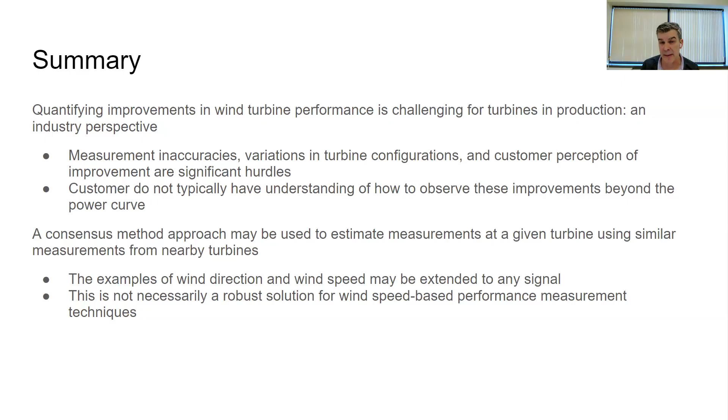For that, really, you can use this for any signal. And even though we can do this and it's great, I still don't know how robust it is. There are limitations to it, but I think there's some useful applications of this that I'll give the example for wind direction.

So the objective is, operators and owners want to observe improvement in their performance after they make a modification, whether it's something we suggest, which is typically hardware, or they do some maintenance. We typically do software upgrades, but they might add VGs, things like that, or they do some maintenance. They clean the blades. Do we see things get better? They make repairs. They would like to see things get better.

Some of the challenges, from our point of view, is we want to have a nice clean experiment. You have a baseline for the turbine operation. We make a single parameter change, and then you have this data collection period where you try and optimize.

But all too often we have things where either OEMs push software upgrades that change performance, or the customers have to do maintenance. They aren't going to push off their maintenance so we can collect our data. So there are challenges with that, that make this even harder to do beyond the fact that it's a real world situation.

If they make the change at just the wrong time - we have some sites where the winds blow from the east in the summer, west in the winter. If they make a change right in that transition period, your before period is winds from the east, your after period is winds from the west. It's not really a fair comparison.

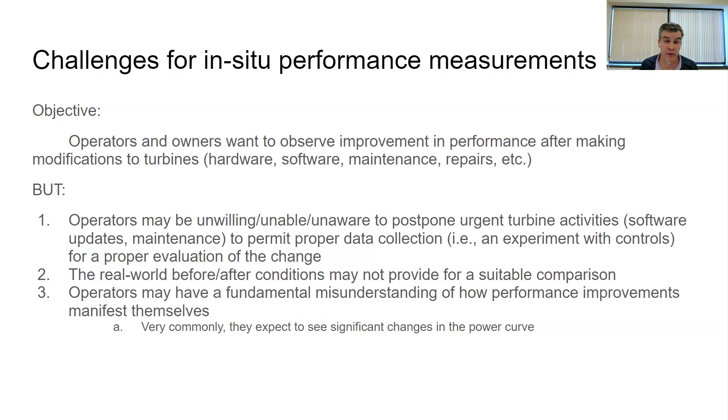Other challenges we encounter: each turbine is unique in its configuration, aerodynamics. They may have different blades, different cleanliness, newer blades, older blades, things like that. The maintenance of the turbines may vary from turbine to turbine. Topography and meteorology can vary significantly from turbine to turbine, especially in areas like California where they put all these turbines in the Altamont Pass. Really challenging area to do any kind of measurements.

What we've found and how we try to approach this is we want to use no additional hardware. We're trying to do this fully SCADA-based, which means we don't want to recommend customers drag around LiDAR, which I think can be valuable, it just makes it harder to change 20 turbines and get timely estimates. So our goal is to not use that.

We also try to avoid using a Met tower just because they may be old, not well placed for the turbines we care about.

And the other thing is, we have turbines laid out in a grid. So how do you measure performance improvement for a turbine in the middle? It can have waking conditions, which if you went by an IEC standard, we would ignore those, but customers make a change, they want to measure an improvement. So there's additional challenges with what do you do with the turbine in the middle of a wind farm.

We do use nacelle anemometry for some things. I like to view it skeptically, just because nacelle transfer functions can change, either the anemometer's out of calibration or anything. I'm not saying don't use it, just be aware of the drawbacks of that.

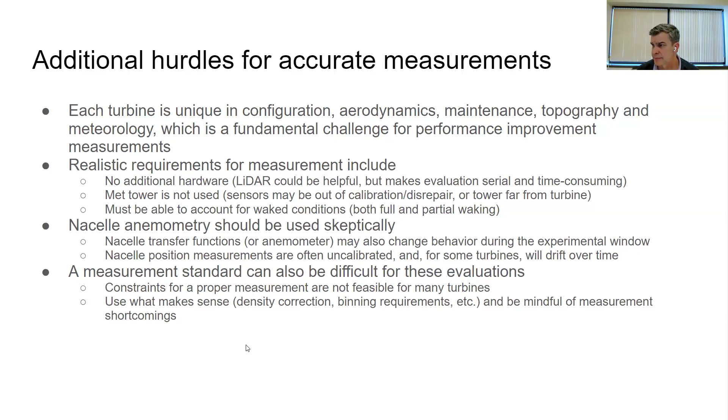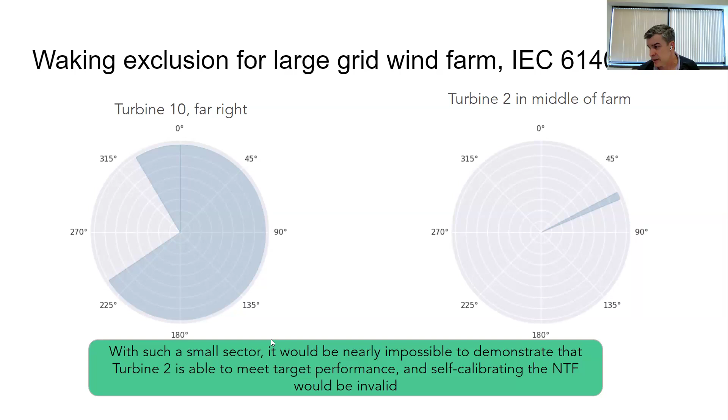Other customers understand that this isn't reality, so I'm not blanket stating all customers. We have this wide spectrum where some people say make them all look like that, and a lot of times what they want us to make them all look like isn't a feasible thing.

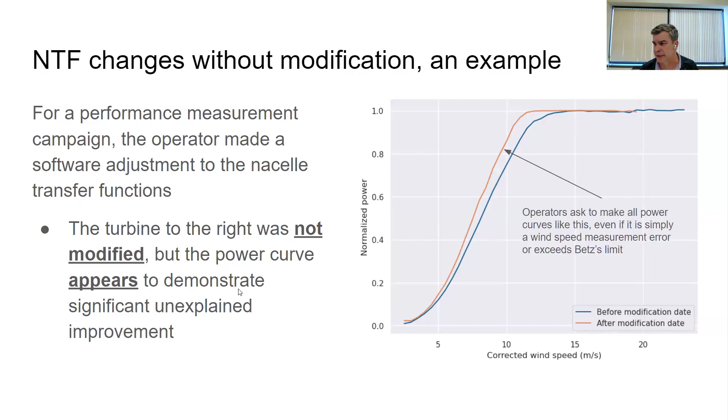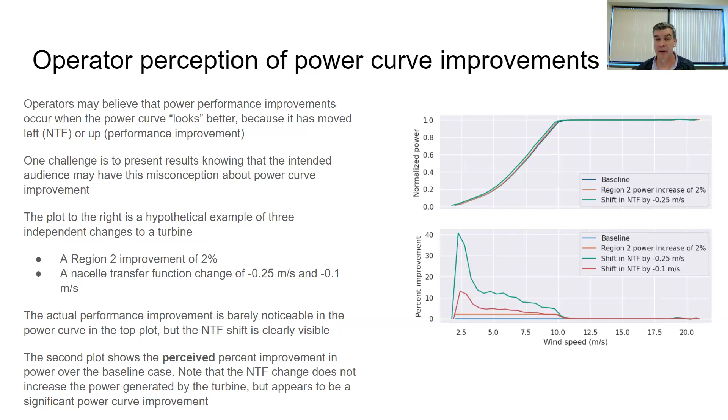So one thing I'm hoping we can get from this working group is a standard that helps customers understand this and be able to measure power performance on their own as well, so we don't have that issue of trust between the recommender of the improvements and the measurer of the improvements.

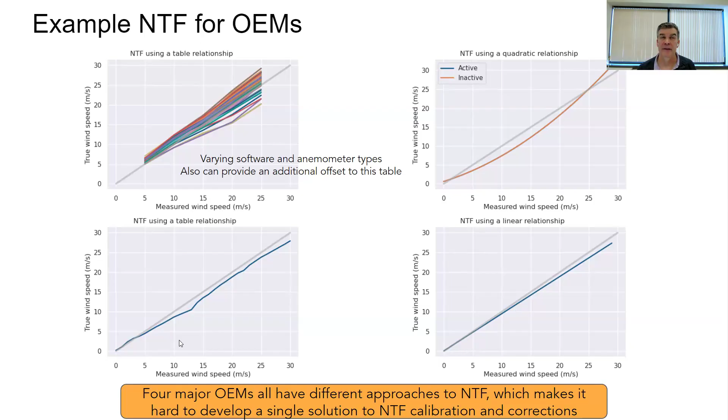So there's not necessarily a single way to improve a nacelle transfer function. If you just have a linear relationship, it's very hard if the wind speed measurements are different—the table is much nicer for that kind of thing. What we've seen is it's blindly applied to every turbine on the farm. They're like, here's the table lookup, just use it for the whole farm. So we don't see turbine-specific nacelle transfer functions in our experience.

So what could help? I've mentioned this a couple of times. It'd be great to have a robust, reliable, transparent, and straightforward approach to quantify performance improvements. Much easier said than done—I know everybody's tried to find a way that works in the real world.

So what I'll be talking about next is this measurement consensus method. It's just one way to help estimate a more likely value for the measurement—any measurement. I'll be talking about wind direction and wind speed, but you could use it for any signal you'd like. We're going to base this on the behavior of nearby turbines.

So this is sort of baseline motivating work for WindESCo's wake steering swarm solution that we have. We're looking for a more cooperative approach among the turbines rather than greedy, where every turbine says this is my measurement of wind direction. We're going to start to look for cooperative measurements of wind direction, and try to find a more likely measurement value.

NREL did a lot of this initial work, Jennifer Annoni did it. Then WindESCo, we did some joint research. We had a wind farm that we are now currently doing swarm on, our wake steering, but we did some base research on this to look at these wind direction consensus methods.

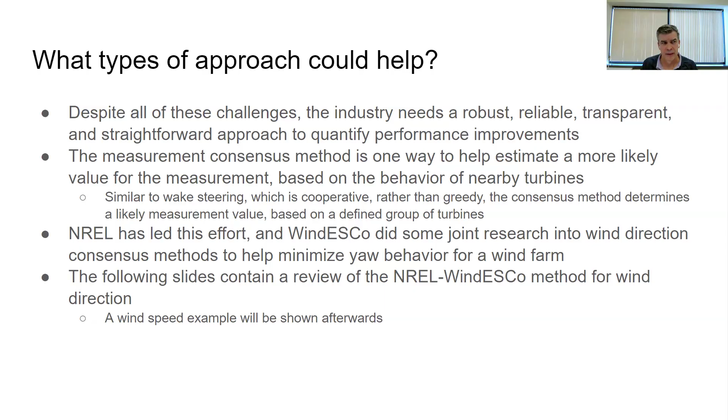At the end of this, there are links to the presentation I took the rest of these slides from, and the original paper if you're curious how it's implemented. I'm not going to show any math here—there's a lot of math, but this is what it looks like and how it gets implemented.

Typically, wind turbines operate individually, optimizing their own performance. The yaw position, or the yaw error of the turbine, is determined by the wind direction sensor behind the rotor, so it has its own measurement issues as well. Sometimes measurements are noisy, sometimes susceptible to different things, and this can lead to yaw misalignment of the turbine.

This is really talking about dynamic yaw misalignment, where instantaneously the turbine is not aligned with the wind. When turbines reach a certain threshold, different for every OEM, of what's considered not pointing into the wind, they'll yaw back into the wind based on these measurements. There's some kind of time period, maybe some averaging. Some OEMs are very quick and could probably relax their yaw controller a little bit; others are very lazy, very slow. They have different thresholds—as a general rule, maybe 1 minute at 10 degrees off, or 30 seconds at 6 degrees off.

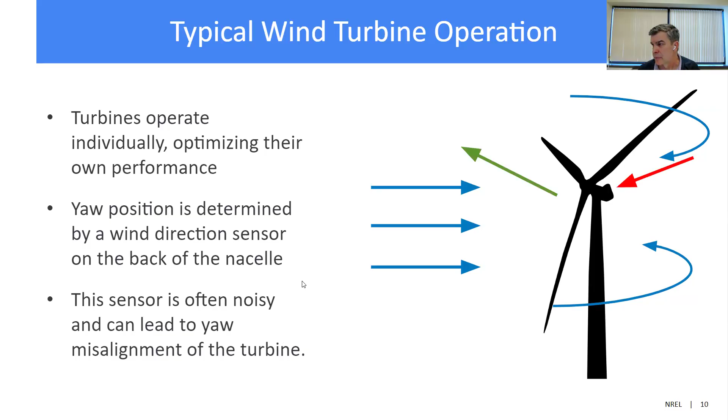So I had not realized these slides are dynamic. Cool. So misalignment can occur across the wind farm.

Each turbine at any moment in time is seeing its own misalignment to the wind. Here is an example showing the wind blowing left to right, but the first turbine is somehow misaligned clockwise. The turbine behind it is misaligned counterclockwise, and so on. This front turbine in the second row is pointed right into the wind, and so on. So instead of all these turbines trying to guess the wind direction, here is a straight west to east wind, but each turbine has its own best guess of where the wind is coming from. Some of that may be driven by topography, so this method is great but not perfect.

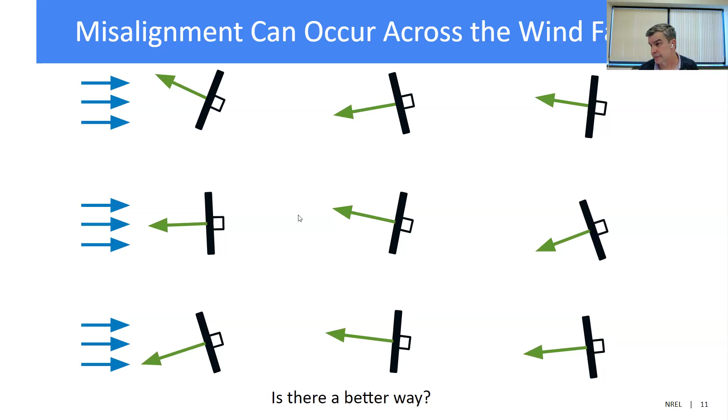The solution NREL proposed is to do some increased communication. The reason they partnered with WindESCo is we have lots of real world data. In this case, this is a 58 turbine farm, and on the left we're showing some real wind direction measurements at a moment in time. Fortunately, in this case, this site's nacelle directions are calibrated to north. This site has wind sector management, meaning they have to shut down when the wind's blowing from certain directions for loads reasons, so they're very diligent about making sure that when the nacelle says it's pointing north, the turbine's actually pointing north.

The end result we see, and we'll talk about how this comes about, on the right we've estimated a wind direction. Rather than on the left where each turbine is pointing in a completely different direction—this bottom row, there's one turbine that thinks the wind is coming from west-northwest, all the others are saying north-northwest-ish—we run this consensus method, and now we get much better estimates of the wind direction.

You can see these still vary cluster to cluster. This cluster in the northwest corner, wind is coming north-northeast-ish, but just the cluster to the southeast of that, the wind looks like it's coming from the north. So there is some sensitivity to geographic location, and that's because this wind consensus method has a distance weighting, where turbines that are nearby count more heavily towards the information we care about.

So the other thing that's nice, and we'll see some examples of that, is this can also correct for faulty or noisy sensors, which I think is a great opportunity for this method to say, hey, this sensor is measuring the wrong direction. Maybe its north position needs to be corrected, or maybe an anemometer needs to be recalibrated, or its transfer function, things like that.

But one thing it does not do, in and of itself, is the consensus method won't correct for things like north alignment. That still needs different approaches. This is just saying we want all the turbines to agree on a direction for the wind. It may not be an accurate direction for the wind, but we're just trying to get some precision.

So you think about the target. You want small clusters. If they're in the bullseye, that's great, but small clusters are better than a scatter approach. So north alignment is a different problem. This doesn't fix that problem.

And the other requirement is that you can't have turbines drifting in their nacelle position, because now you're trying to correct positions and you're not quite sure what's going on, because everybody's truth is different from moment to moment.

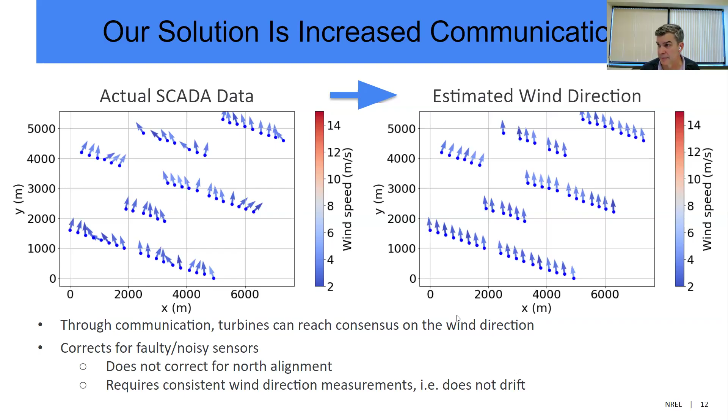So a little more detail about this data set that we have. This is a very large wind farm. These are all 2.5 megawatt turbines. These turbines are calibrated to the north. We've collected 1 hertz data, and the nacelle direction, power, yaw error, wind speed, and pitch. For these turbines, we can also calculate 1 minute, 5 minute, 10-minute statistics from this 1 second data.

We provided 8 months of high-speed data. At this site, we do have a Met tower that provided information on wind speed and wind direction. This Met tower is also maintained and calibrated, so we know we can trust these measurements as well. That's not always the case at farms we've encountered.

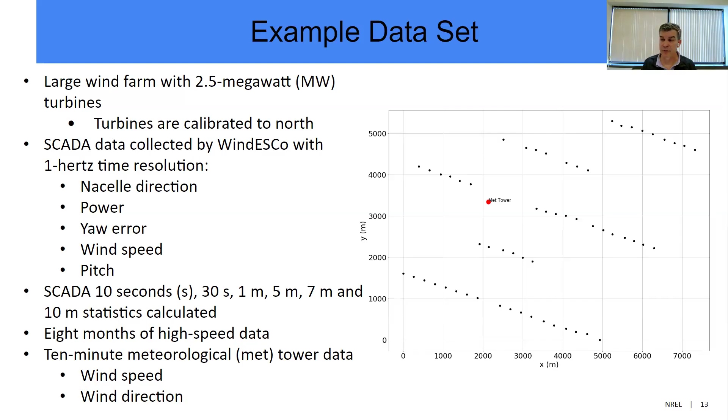So here's an opportunity. You can look and say, well, the measurement is significantly different from the consensus value, so there must be something wrong with that sensor. That's a really nice benefit of this method, is that you could identify faulty sensors from that kind of comparison.

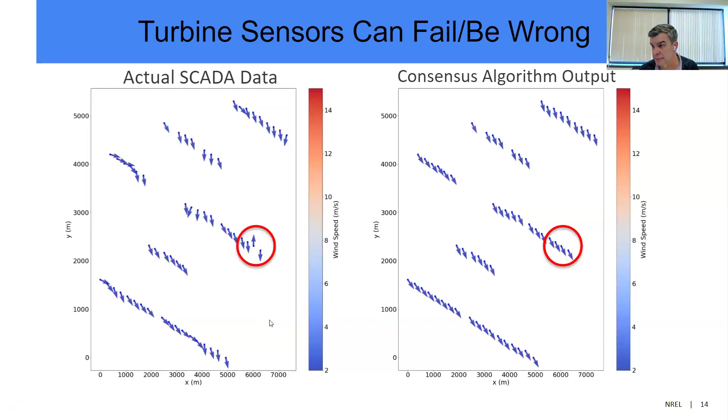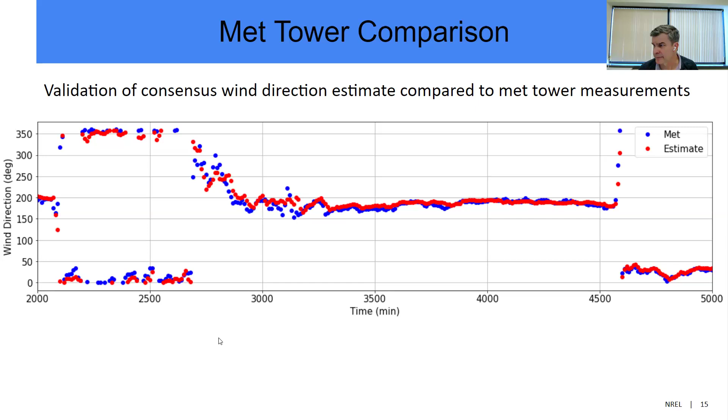So some challenges and some other alternative concepts that NREL and Windesco looked at. Because this method is relatively complex to implement—it's not impossible, it's just complex compared to these other methods—they evaluated some simpler methods to say, do we even need to be doing something this complicated?

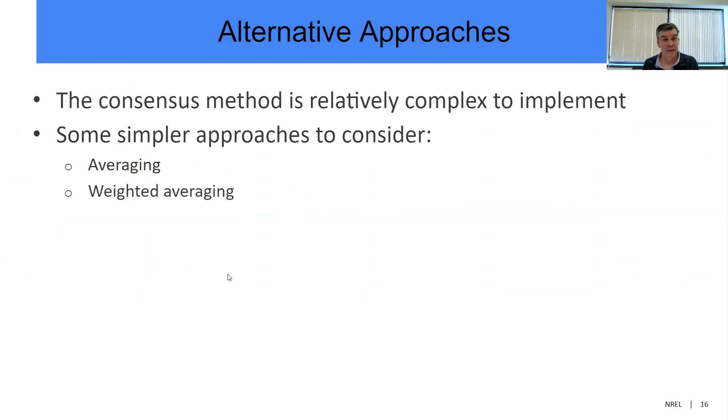So they did a straight up averaging across the farm, some weighted averaging where now we're going to weight distance as part of our averaging. And then they did a clustered weighting average, where they said, okay, now we're just going to look at clusters and weight for a given cluster, what does the wind direction look like? So this is heading more towards a consensus method. Rather than weighted averaging across the whole farm, you just do this weighted averaging for different clusters.

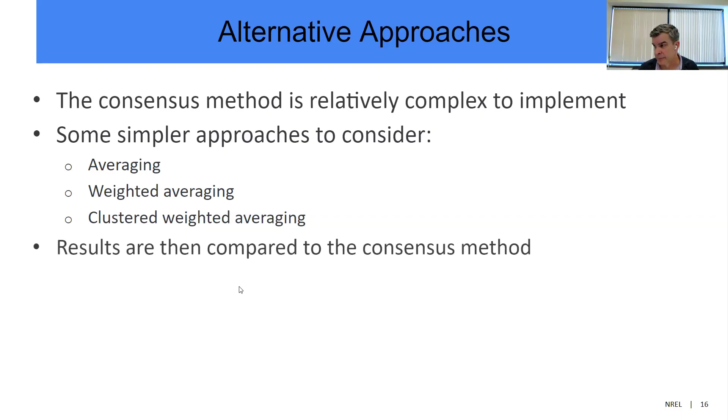Now let's compare those results to the consensus methods and see what we get. So how does this feel different? Now we're going to get a little bit into how the consensus method works.

So we get wind direction measurements at each turbine on the left there. If we're going to go averaging along the bottom path, you just average across whichever turbines you've selected for the averaging, give them the appropriate weighting if there's a distance weighting involved. And now you have a new estimate of the wind direction.

So the averaging method, you can consider that open loop. There's no feedback. The consensus method, similar thing. We compare the estimate to the measured wind directions. Then we compare that estimate to the wind direction of nearby turbines. Now here's where the correction would come in if those are different. We then update our estimate, and we just repeat that process until we get some convergence on a solution. We're like, okay, this isn't changing any further. And then we would output an estimated wind direction.

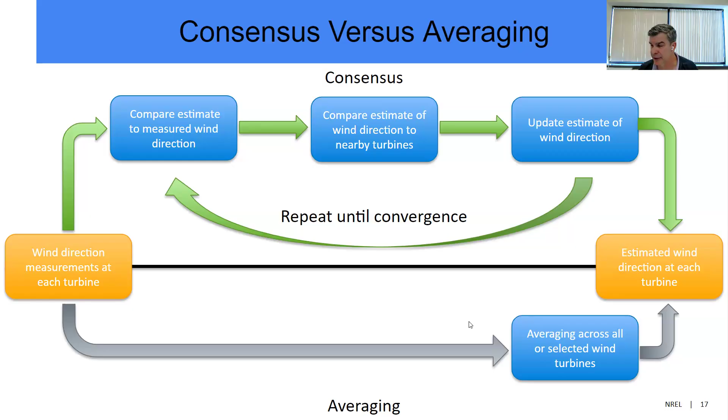So now again, for this wind farm, we're going to average the wind direction. We did a circular average, so we made sure we accounted for stuff going between 0 and 360.

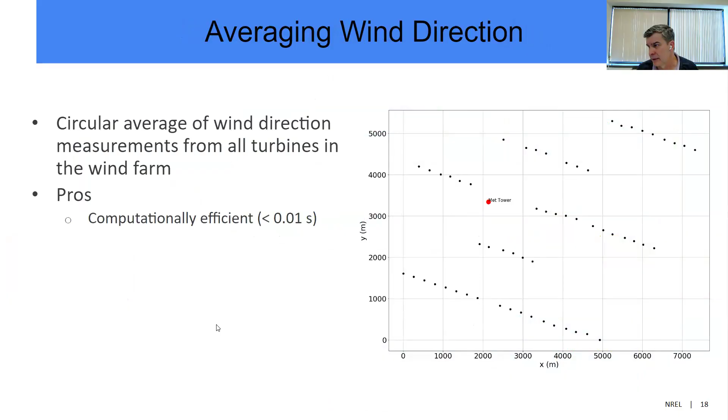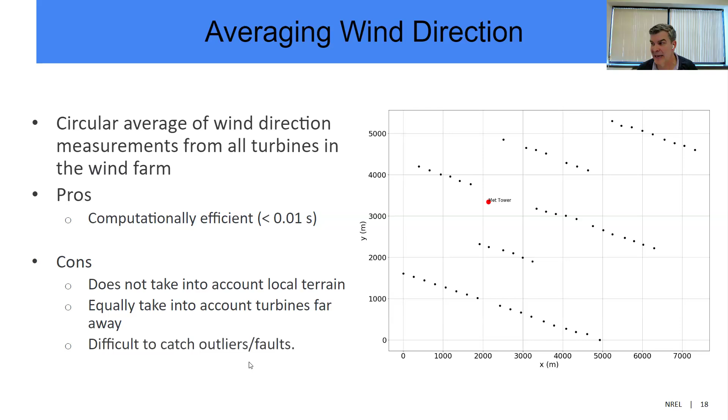So just the averaging, really fast to do. Some disadvantages, it doesn't take into account local terrain, which we're doing by using just adjacent turbines. So it weights far turbines as much as close turbines. And it's harder to catch outliers and faults. We'll see in the results.

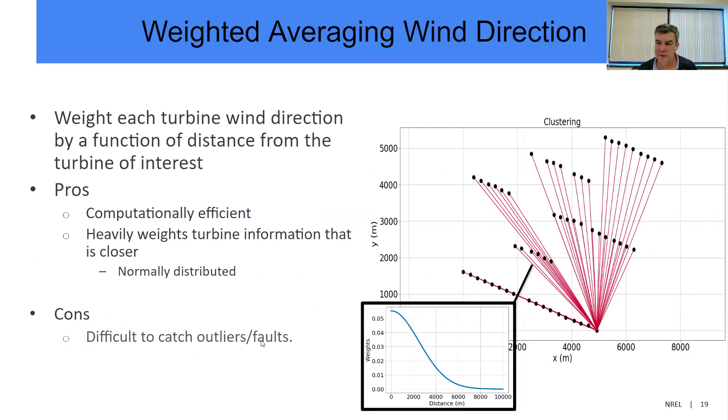This weighted average method is still very easy to compute. Turbines that are closer get heavier weight. Some cons, it's still difficult to catch outliers and faults, and we'll see when we look at an example.

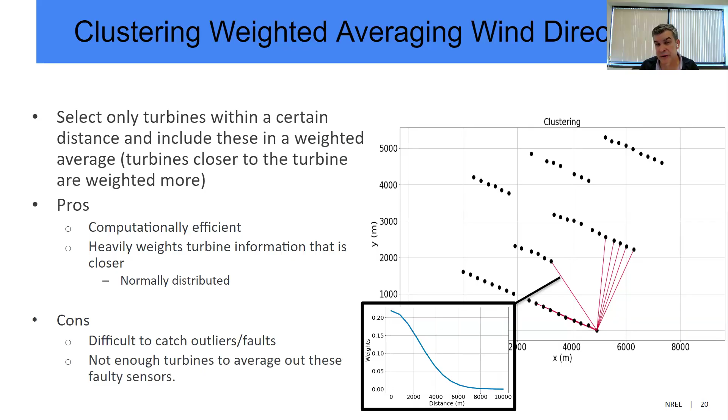This does a little bit of a better job, but you still may not catch outliers. Mostly you can't catch outliers because you don't have a lot of turbines. If you have 7 turbines in your cluster, which one's bad? 2 of them are bad. It's hard to decide that they're bad.

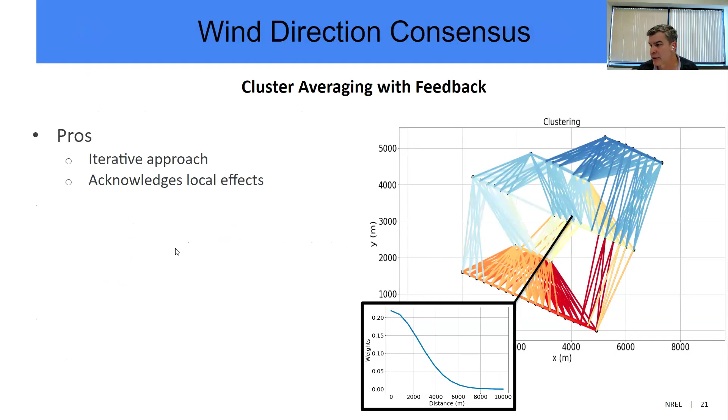This cluster averaging is iterative, so that's an advantage of it. Because it heavily weights nearby turbines, it has some local effects. It can catch outliers. Disadvantage, it's difficult to implement, and it's slower, right?

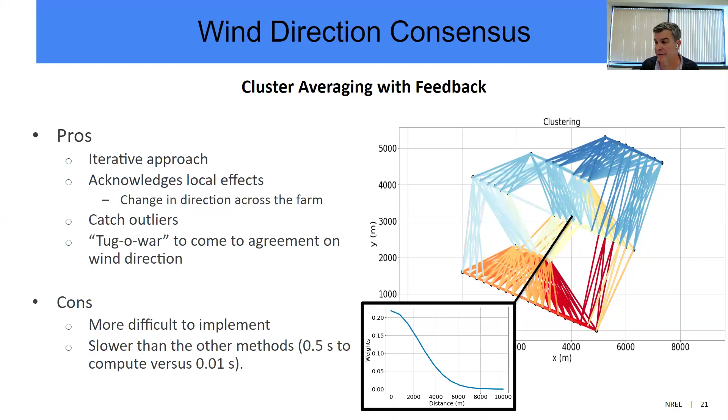But if we look at these calculations, half a second versus a hundredth of a second, when you're talking about controlling a wind farm, half a second's not a big deal, just in terms of giving feedback that's reliable for people to do things.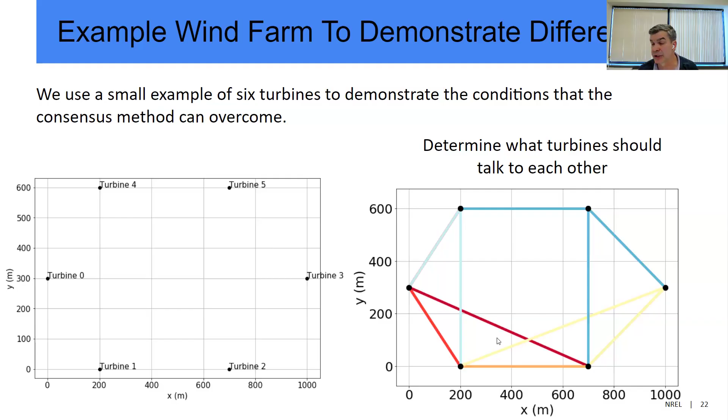They made a synthetic example, just a small wind farm, 6 turbines, labeled them counterclockwise, turbine 0 is on the left, counterclockwise up to turbine, I guess they did a little zigzaggy thing. Turbine 4 and 5 are different. We're going to pick which turbines talk to each other, so you can see here is just some decision. This is part of the algorithm to decide which turbines get included.

And they've introduced a faulty signal on turbine 0. So the other 5 turbines are measuring the wind direction from the west. Turbine 0 says the wind is coming from the south.

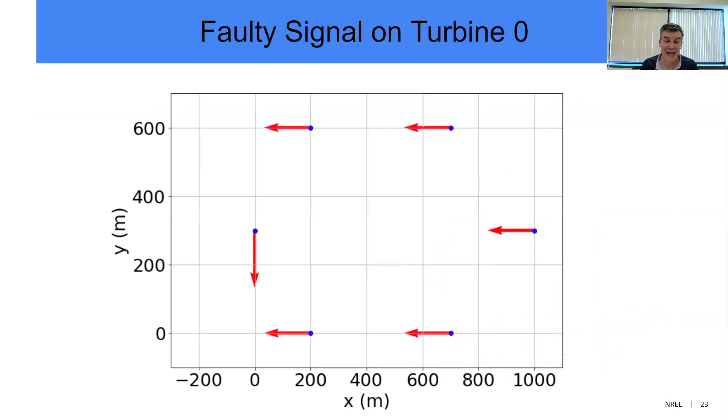Equal average in the lower left. You can see all the turbines are pointed in the same direction now, but it's not the correct direction. The faulty measurement from turbine 0 has now been averaged across the other turbines. So now instead of having 1 wrong by a lot, you have 6 wrong by a little bit.

Weighted average is a little bit better. The incorrect measurement is just affecting the 2 adjacent turbines, but you can see turbine 0 still has a lot of misalignment to the wind direction because it's only being corrected by 2, not all the other 5 turbines.

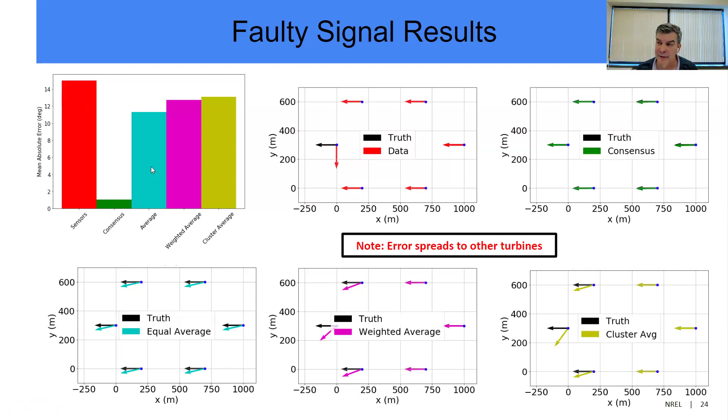And then the cluster, again, it's even worse because now we're only considering a few turbines there as well. There's no weighting from the other turbines. And the bar chart in the upper left just shows the mean absolute error, that the consensus method is far superior, then the average is the next, and the weighted average and cluster average.

So now let's think about how many turbines are good for a cluster. This plot shows that if we do clusters, we have some control over the size—that's the yellow line on top. The green line is the consensus method for how many turbines we want in a cluster. The average and weighted methods are shown as dots since they consider the entire farm, without any clustering.

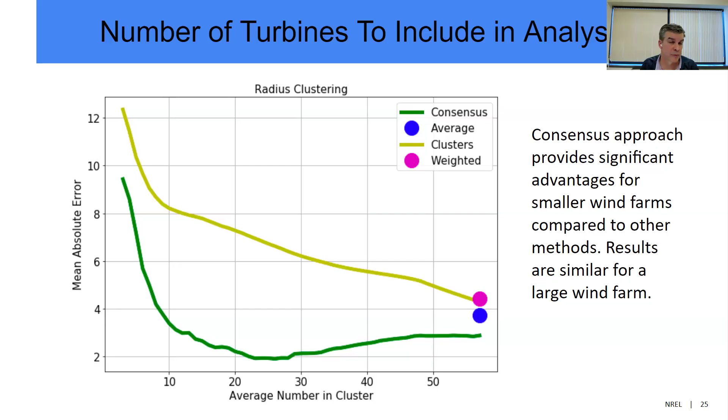We can see the consensus method is great. For smaller farms, up to about 30 or 40 turbines, it's still significant. But as you get higher and higher, the methods start to get closer in results. So there's a huge advantage for smaller farms, but not necessarily as much advantage for giant farms.

So NREL and WindESCo went into this hypothetical experiment on what we could do if we designed some kind of yaw controller to take into account this consensus wind direction method. They take this modified wind direction at each turbine and subtract the wind direction actually measured by the turbine, which gives us an error in our wind direction signal.

They did calculations for turbines with high error—how often does that occur—and turbines with low error, using two different power curves. Then they look at what energy could have been produced versus what was actually produced. The difference is what they call their AEP gain. So they look at the energy actually produced, generate a hypothetical estimate of what could have been produced, and ask: could this new yaw controller work to improve energy?

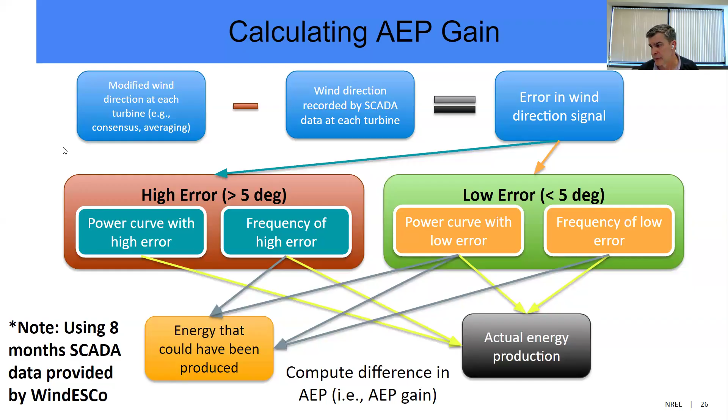This plot shows the x-axis as time scale—what kind of averaging you need to do to realize the benefits. The y-axis is the potential average AEP gain per turbine. They did this for the four different approaches we talked about. The slides I link at the end explain this in more detail—I didn't want to get into that here since we're really talking about just the consensus method.

You can see that the consensus and average methods actually produce pretty similar gains. The weighted and clustering methods don't necessarily do as well, but even with the clustering method, you'd still get a 1% AEP improvement. So just doing something besides letting turbines operate on their own understanding of wind direction can help improve performance, and it looks like using 1-minute averages is sufficient.

We still see benefit with 10-minute data, which is great because for a lot of farms it's challenging to get the high-speed data needed to calculate 1-minute statistics. So even if all you can get from a farm is 10-minute data, this kind of approach could work.

Now, this is all hypothetical. It's really easy to say this would work—the implementation of this is a much more challenging thing. Again, not the point of this conversation.

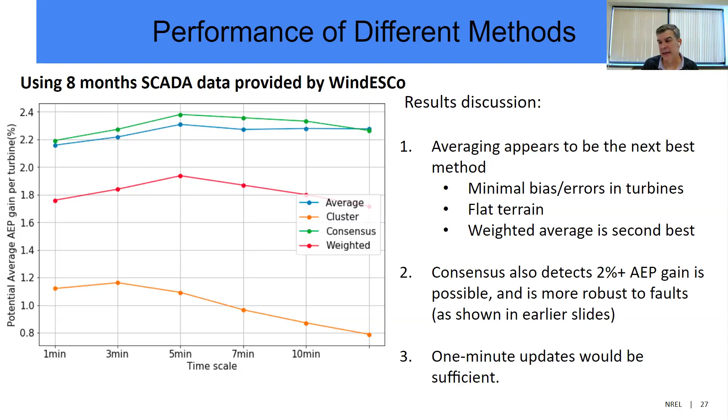So I wanted to bring it back to what I suggested at the last meeting, that this consensus method could be used to help improve wind measurements. This is from a 50 turbine farm. One turbine has an incorrect nacelle transfer function—it's the blue one.

Just normalizing the power, you can see this turbine is producing 60% of its power at 5 meters per second—that's a fantastic turbine, but not actually realizable. So what do we do? How do you decide how to correct that power curve to maybe make all our analysis from this turbine at least useful? If you calculate derived statistics from this, like tip speed ratio or power coefficient, all of those measurements are going to be wrong because you have a bad nacelle transfer function.

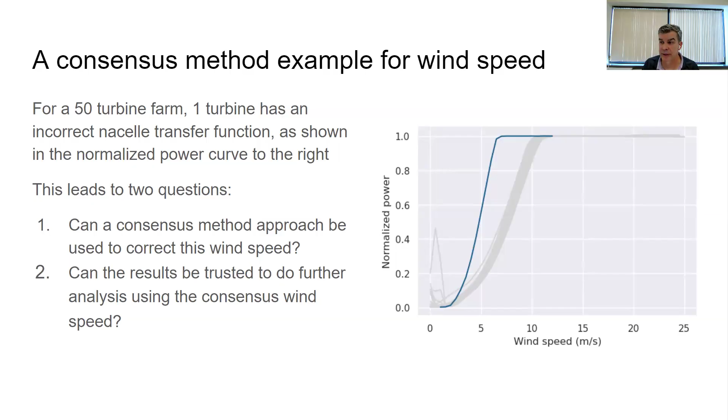I don't know if the consensus method is strong enough to say yes, this turbine is now underperforming compared to others, but it at least puts it in the ballpark with the other turbines so we can calculate downstream statistics, TSR, CP, things like that, and maybe start to evaluate those parameters with a little more confidence.

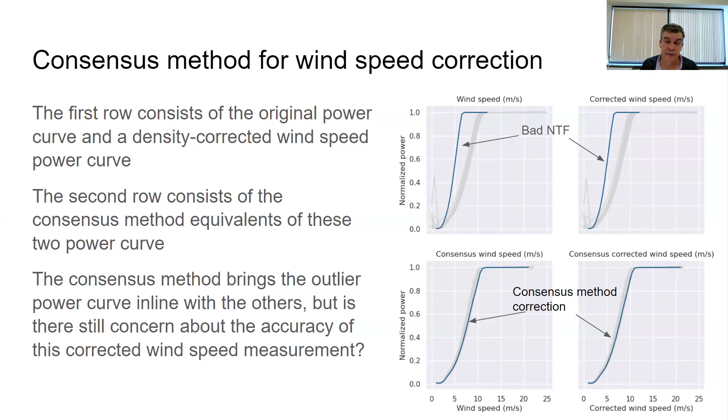So in summary, consensus methods are just used to help correct turbine measurements that may be outliers. I think it does a great job of that, can be helpful to identify outliers, but it's still just an approximation to the true value. How much is that turbine's terrain unique from other turbines even nearby? This was in a pretty open area, so it's probably much better than if you were in the mountains in California, where one turbine is 20 meters higher than the next closest turbine.

And so for wind speed measurements, this is an improvement over doing nothing, and it still may not be accurate. A great thing to do would be go get a LiDAR or Met Tower to confirm accuracy, like we did there, but we haven't done that. We're not necessarily using this to do anything, but if you wanted more confidence in your measurement, you'd want to go measure with a LiDAR or something like that. And now you defeat the purpose of trying to be a SCADA-only data analysis company. For experiments, that might be the nice thing to do. But that's the consensus method approach.

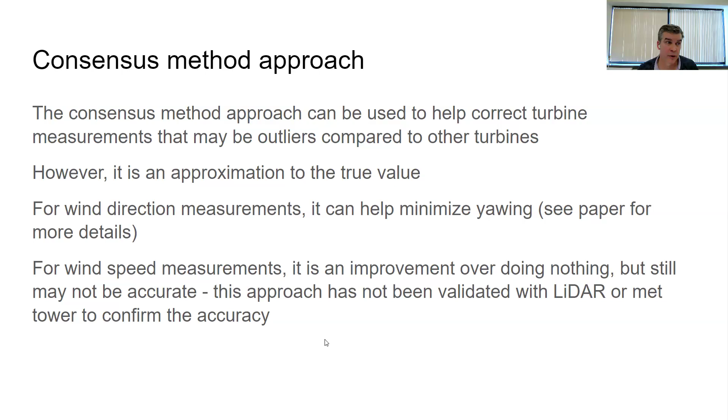The paper is fantastically written, and the slides give a little more background on what's going on. So I put some topics for discussion. I don't know, that's my presentation. And then after that is just the references — there's two here. I think you will send out the presentation, so you'll have these links you can click on. But that's my presentation, so I guess we're open for questions or discussion.